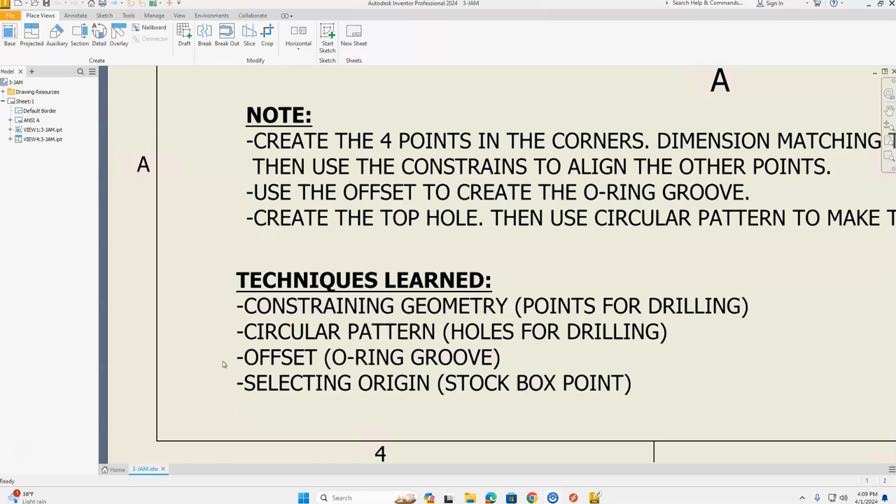Today we're going to take a look at creating the 3-jam part in Inventor. The things that we're going to be focusing on today is constraining geometry for the points for drilling and pocketing. We're going to use circular pattern, we're going to offset, and we're going to select the origin from our stock box point. A little different than we're used to.

We're going to come back and take a look at this note that's up here once we get to those sections on the part itself. Taking a look at this, we can see that we're going to be using our rectangle tool for this first geometry we're going to be creating, and it is going to be a rectangle that is 3 inches horizontal by 3 inches vertical. Okay, come along.

This is the 3-jam. Let's go up to the orange file in the top left hand corner of the screen and select New. We're going to choose standard.ipt and click Create. And then we're going to take a 2D sketch, place it on our XY plane, and click Front in our World View Cube. And let's start with that rectangle tool. Lock onto our origin, get our green dot, click, stretch it out to the upper right hand quadrant.

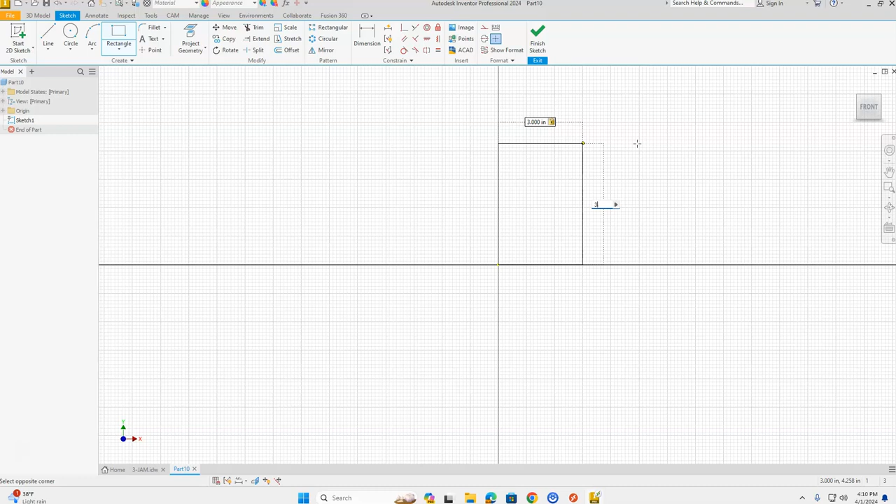Our horizontal dimension was 3. Press the Tab key on the keyboard. Our vertical dimension was 3 also, and press Enter on the keyboard. Green check mark, Finish Sketch. Let's click Home in our World View Cube to zoom all, and let's go back and reference our part. So we have 3 inches by 3 inches.

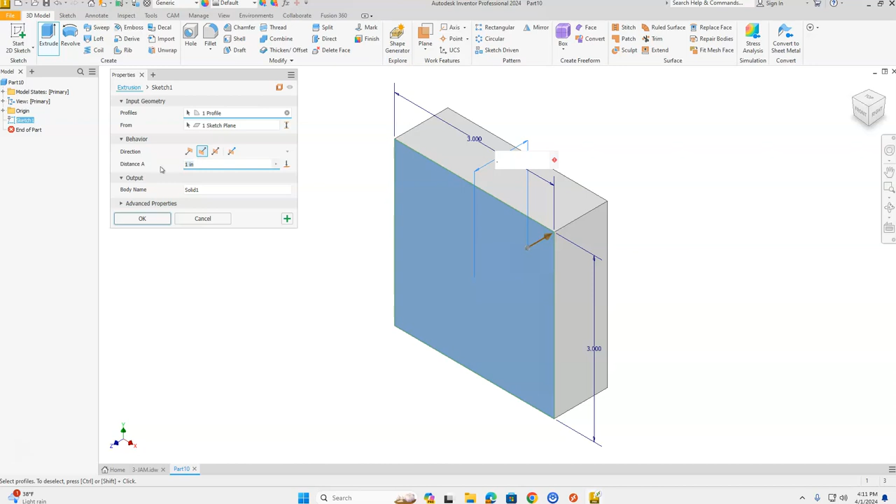Now we need that extrusion depth. We're going to find that on the right side view here. 0.375 is that extrusion distance. So let's take an extrude. We want that orange arrow going away from us. So we're going to click our flip direction, and we're going to change that to 0.375, and then click OK.

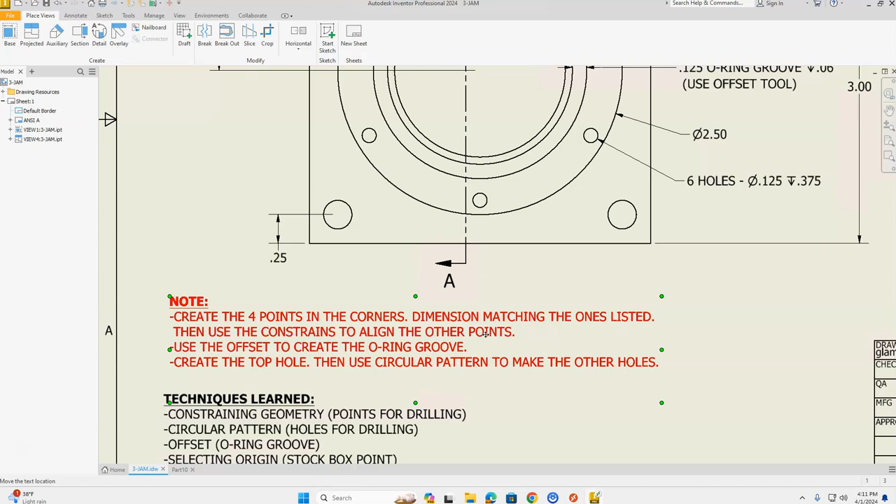Next, let's take a look at our part. We have these 4 holes that are in the corner of our rectangle, and on our note that's down here, you can see that to create the 4 points in the corner, we're going to dimension matching the ones that are listed, and then we're going to use the constraints to align the other points. So that's with our horizontal and vertical constraint. Okay? So let's do that.

Let's take a 2D sketch, place it on our front view, click Front in our World View Cube, and we're going to use our point tool to place those points, 1 in each of the corners. Okay? Now, next we need to dimension those. So let's press Escape to let go of the point tool and reference our drawing again.

This top point in the top left corner is 0.25 down from the top and in from the side. Let's start with those dimensions first. 0.25. So dimension from the top to the point. Bring that out to the side. 0.25 is the dimension. Press Enter on the keyboard or a green check mark in that window. And once again, dimension tool, left hand side to our point. Bring this up. 0.25 is this dimension as well.

For our next dimension for this point over here, let's take a look at that. 2.75 from the left hand side to the center of that point. So let's dimension left hand side to the center of that point, and this dimension is 2.75, green check mark. And let's see what other dimensions we have for these holes. We have 0.25 from the bottom up for this hole here, so let's place that dimension from the bottom to our point. 0.25, and green check mark or Enter on the keyboard.

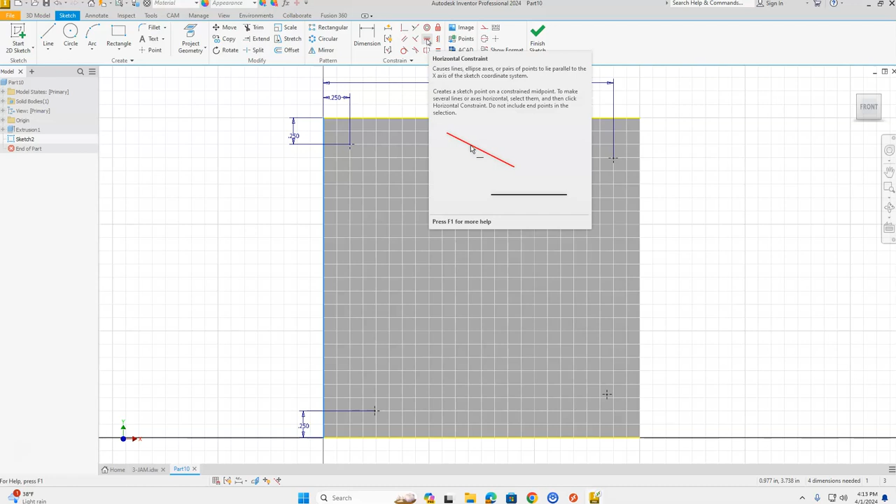Alright, next, press Escape to let go of the tool, and now from our note that's here, we're going to use constraints to align the other points. So in our constraint area, we're going to find our horizontal constraint. That looks kind of like a feather laying horizontally. So we want to click our top left hand point, top right hand point, and that's going to bring that point up. We're going to click our bottom left hand point, bottom right hand point, and that's going to bring that other point into alignment.

Next, we need to press Escape on the keyboard to let go of the horizontal constraint, and we're going to choose our vertical constraint next. And we're going to click our top left, bottom left, and that's going to align those two. And then we're going to click our top right and our bottom right to align those as well. Green check mark, Finish Sketch.

Now let's take a look at what we're going to do for the holes. For the holes, we need to find a note. Here it is. The note says we have 4 holes, 0.25 diameter, and it goes all the way through.

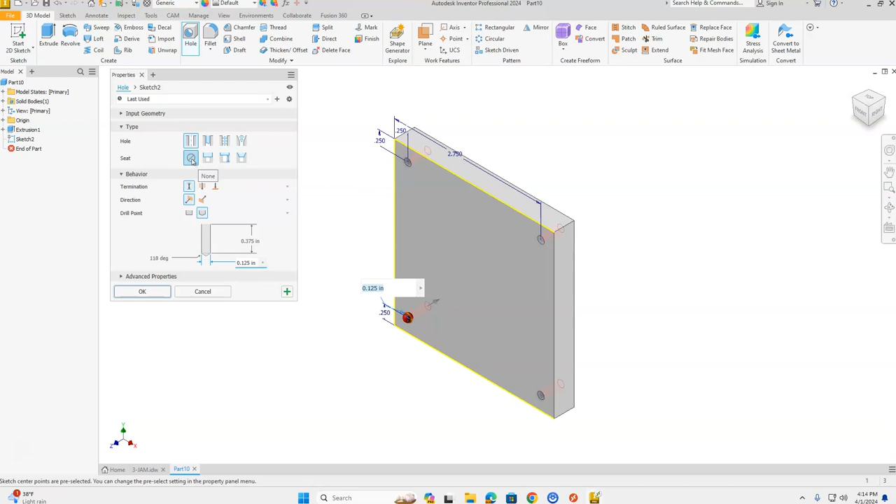So back on our part, let's go use our hole tool. We want to have a simple hole with no seat. We want to change the termination distance from distance to through all. It looks like a stack of pancakes with a fork stabbed in the middle of it. And we want to change our diameter here to 0.25 and click OK.

Excellent. Next, you can take a look at our part here. We have this square in the background done. We're going to take this circle and extrude it out. There's an inside and an outside to the circle. The inside diameter is right here at 1.5 and the outside diameter is right here at 2.5. So that's next for us.

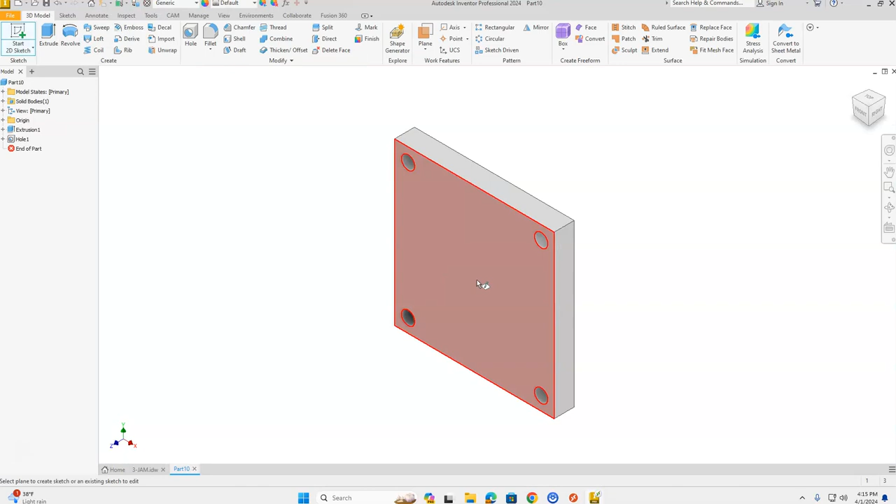So let's take a 2D sketch, place it on our front view. Click front in our world view cube to zoom all and center it on our screen, and we're going to use our circle tool next. We're going to place a circle and we're going to stretch this out for the inside diameter of 1.5. Press enter on the keyboard. Press the escape key.

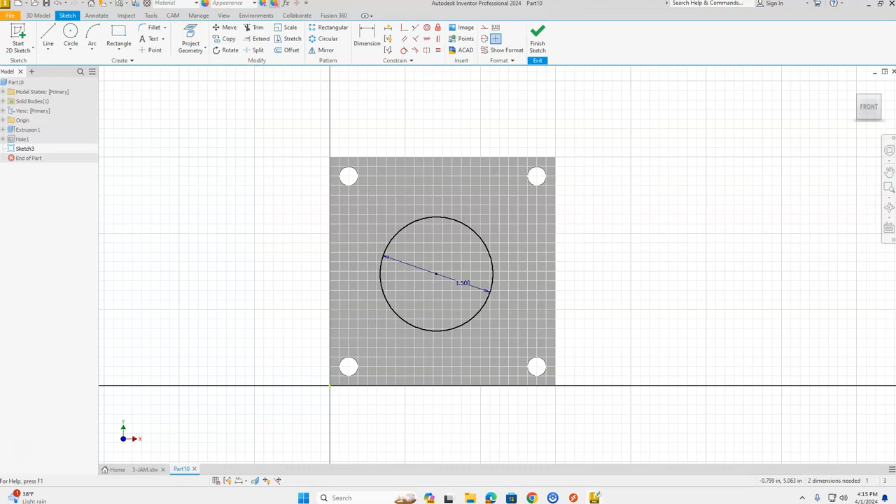Now we have to take a look at positioning this on our part. The center of this circle, the center of this part, is 1.5 in from the side and 1.5 down from the top. So let's get our dimension tool. Let's click the top of our part. When it turns red, click to select it, and we want the center point turned red on our circle. Bring this dimension out to the side. This is 1.5 for that dimension. Enter on the keyboard or a green check mark.

Then we're going to choose the left-hand side of our part and the center point of that circle again. Bring this dimension up. This dimension is also 1.5. Enter on the keyboard or a green check mark. Okay. Next, the outside circle. Our outside circle out here is 2.5 inches, 2.5 for the diameter. So let's go create that one as well.

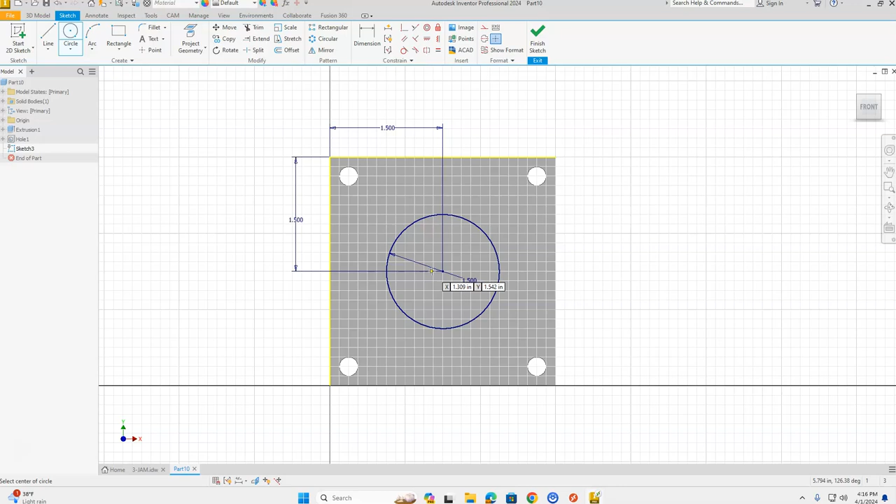We're going to use our circle tool, lock onto the center point, that's the center of that circle, bring this out, and this circle was 2.5 in diameter. Press enter on the keyboard. Green check mark, finish sketch, and now we're going to extrude that. Taking a look at our drawing for this extrusion, we find that on the side view. We can see that this from our square out for our circle is 0.375 for our extrusion distance.

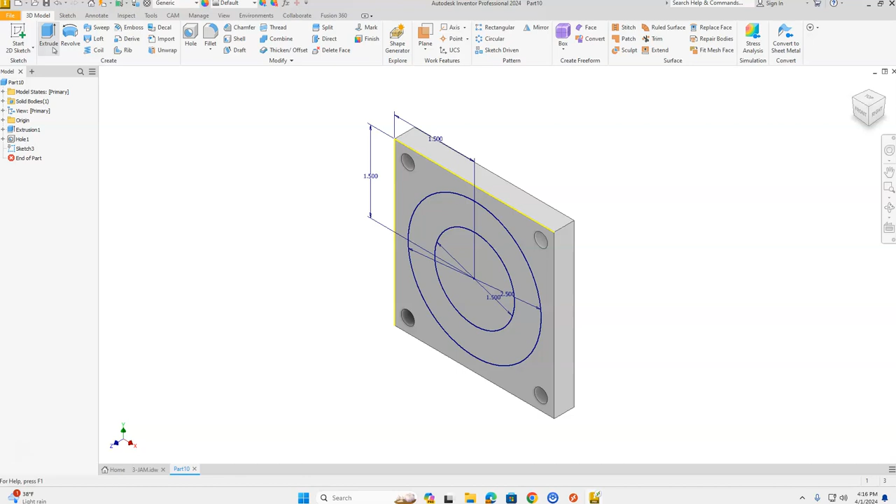So we're going to get our extrude tool from the ribbon bar at the top. We want to click our shape, our geometry in here that makes it look like a donut, not the inside. We want the outside. Looks like a donut. And we're going to change our extrusion distance to 0.375. And then click OK. Hey, we've got a great start on it so far.

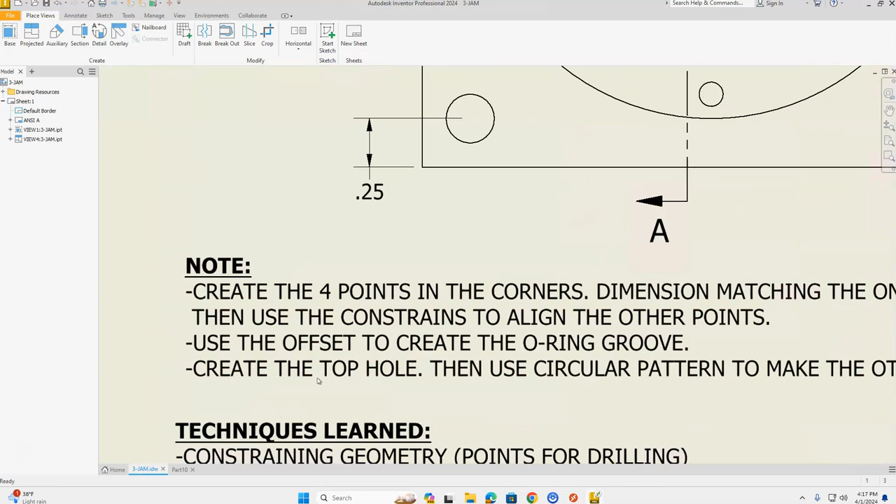Let's see what's next. Next, we're going to create these holes that are in here. So in order to do that, if you take a look at our note that's down here, it says create the top hole and then use circular pattern to make the other holes. Okay, we can do that next. So we're going to create this first hole up here. We're going to place a point, and that point is going to be 1.5 in from the side and 0.375 down from the top.

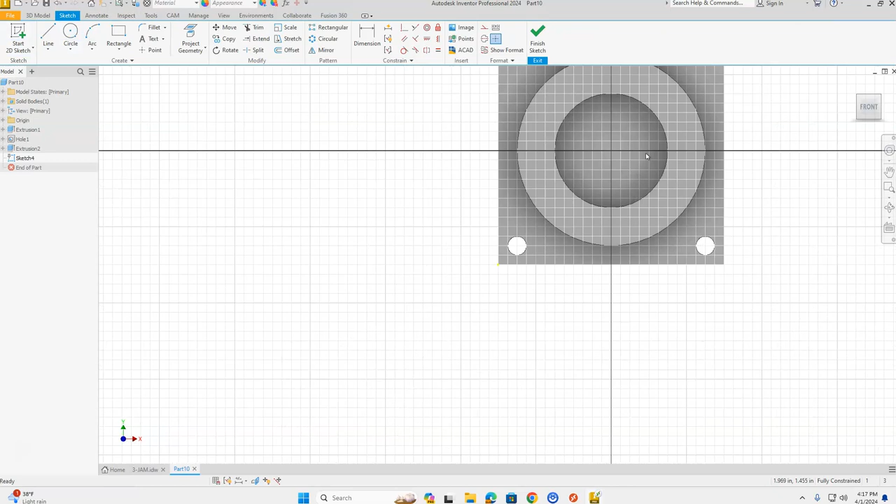So we're going to take a 2D sketch, place it on our front view, and click front in our world view cube to zoom all and center that on our screen. We're going to use our point tool from the create section in our ribbon bar.

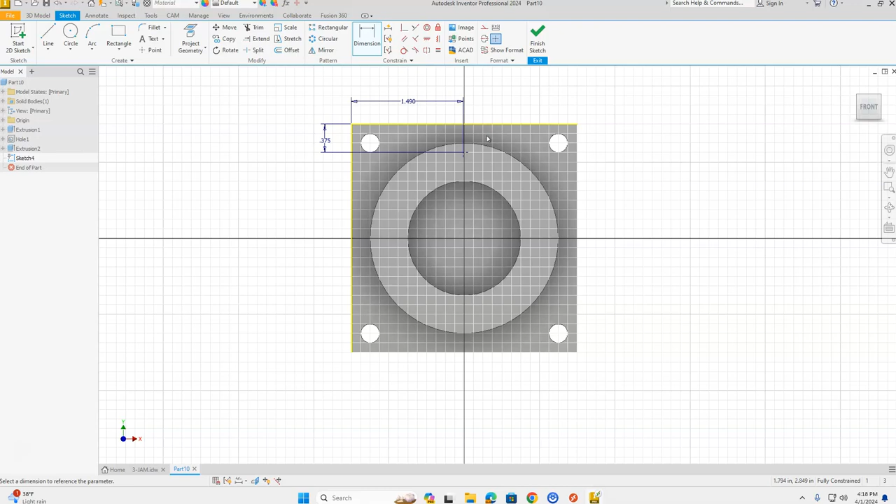Click a point up here towards the top at the 12 o'clock position as it would be on a clock, and we're going to dimension from the top of our part to the point. Bring that dimension out to the side, and this dimension is 0.375. Green check mark. We also are going to dimension from the left-hand side of our part to that point we created, and this dimension is 1.5. Green check mark. And now we're going to finish sketch.

Going back to our drawing, we're going to use our hole tool. So now we need a specification for the holes that are here. Right here it is. We have 6 holes that are 0.125 in diameter and 0.375 deep. 0.125 diameter, 0.375 deep. So back on our part, we're going to take our hole tool. It should automatically choose that point that's there.

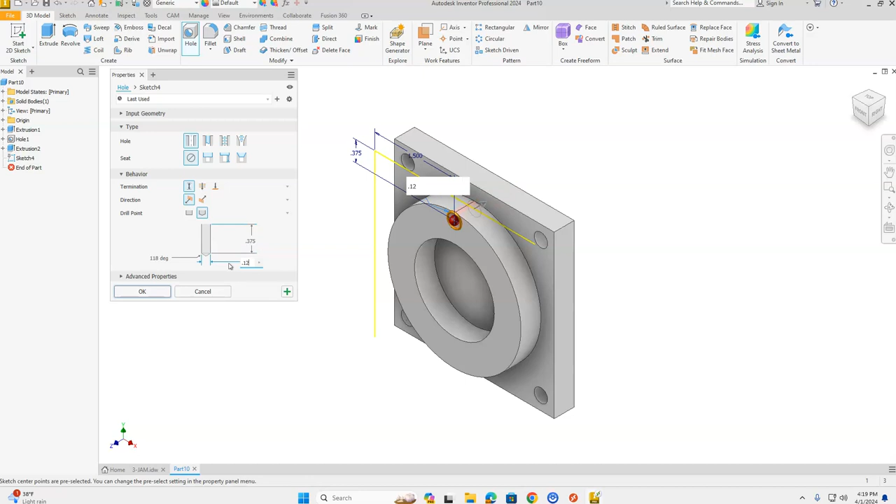We want to have a simple hole with no seat. We want to change it to a distance icon right here for the termination behavior. And we want to change our depth to 0.375. And we want to change our diameter to 0.125 and then click OK.

When we were on Jam 2, we used circular pattern in order to circular pattern the sketch geometry going around. Now we're going to use circular pattern to circular pattern a feature going around. So let's take a look at our note here. It says 6 holes, 0.125 and 0.375 deep. Create the top hole, then use circular pattern to make the other holes.

Back on our part, going up to our pattern section in our ribbon bar, we're going to choose circular pattern. First it wants us to choose the feature. That's the hole that's here. If you have to, you can zoom in to select that. Then we're going to go to our second pick tool that's down here. That's our rotation axis. And we're going to choose the outside of the largest circle on our part for the geometry.

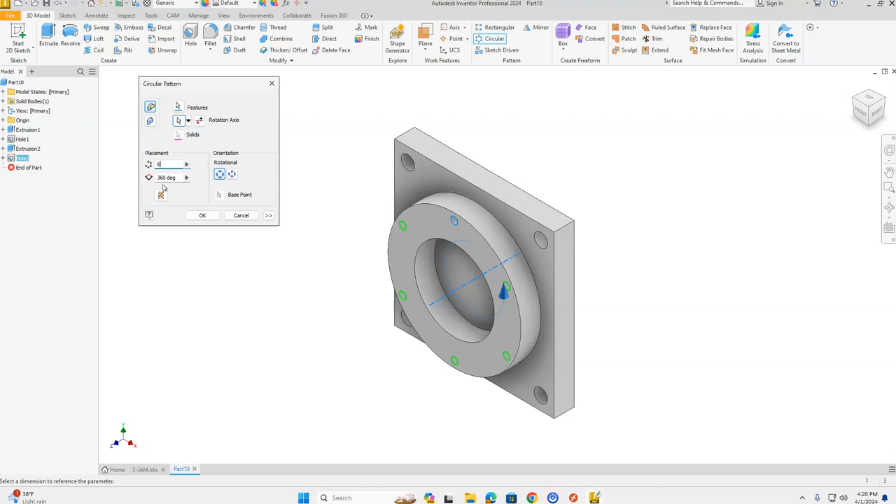We want to have a total of 6 holes, so change our count to 6. We want our rotation degrees to be 360 degrees, and then click OK. And there's our 6 holes going around there. That looks awesome. Let's go back to our geometry, our sketch, and we can see that we have this O-ring going around here as well.

And here we're going to create the inside of the O-ring, which is 1.63. And then we're going to choose the offset tool and offset it 0.125. So let's go back to our sketch and do that. Take a 2D sketch, place it on the front view of our part. Click front in our world view cube to zoom all. That centers it on our sheet.

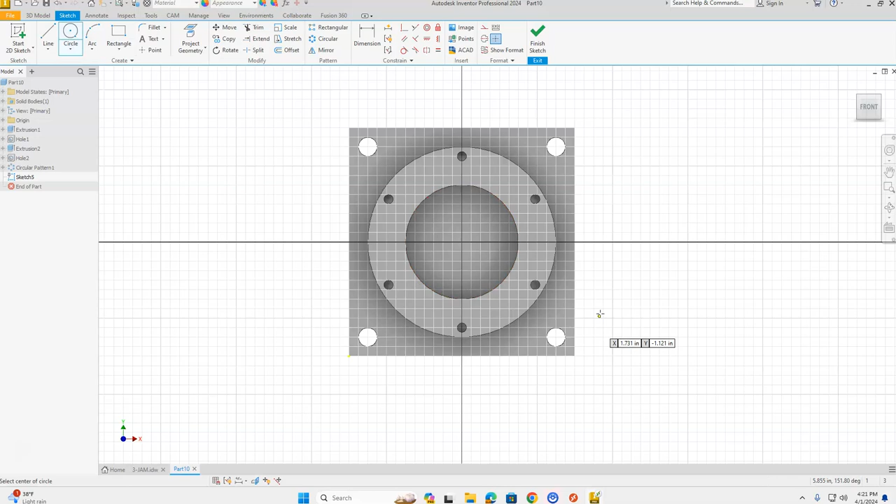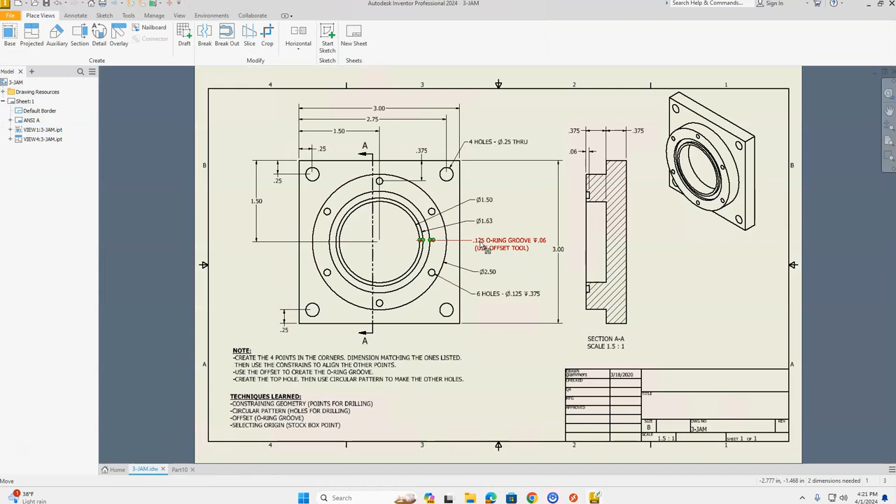And we're going to use our circle tool and we're going to snap onto the center point of our sketch. Stretch this out. This diameter was 1.63. Press enter on the keyboard. And now we're going to choose our offset tool. And our offset tool we are going to use to offset 0.125. Okay?

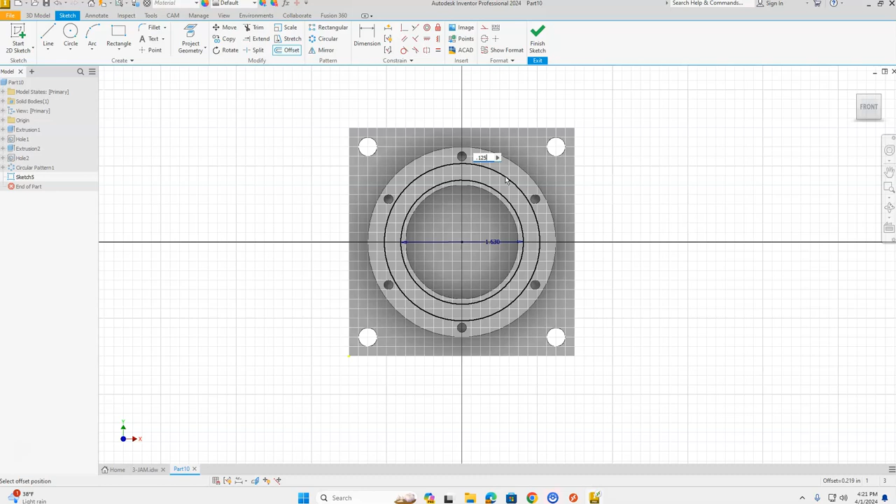So we're going to use our offset tool right here from the modify section. We're going to choose that circle we created. Go to the outside of the circle, not to the inside. And we're going to make that a distance of 0.125 and then press enter on the keyboard. Green check mark, finish sketch.

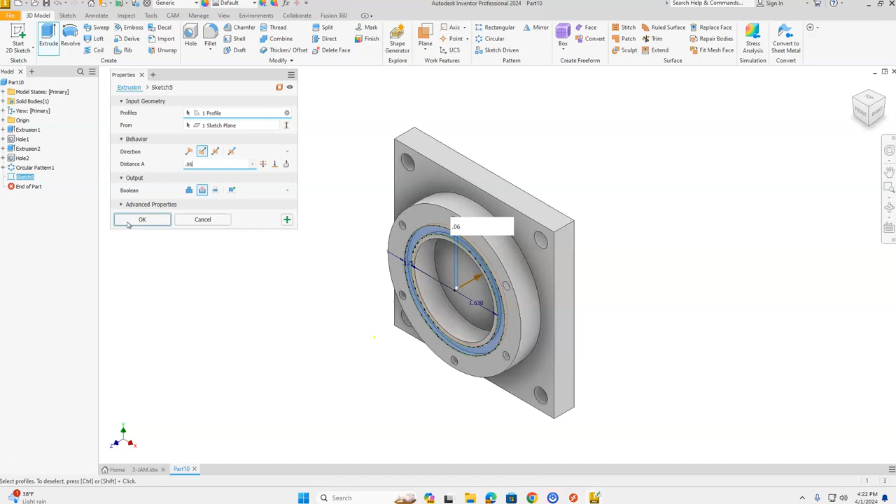And we're going to extrude. Referencing our drawing, we can see here that we want it to go 0.06, and also it's listed here 0.06 for that depth. So we're going to extrude, select that area in there, that O-ring groove, and we're going to change the flip direction so it cuts, and we're going to change our distance to 0.06 and then click OK. So now we have our O-ring groove in there.

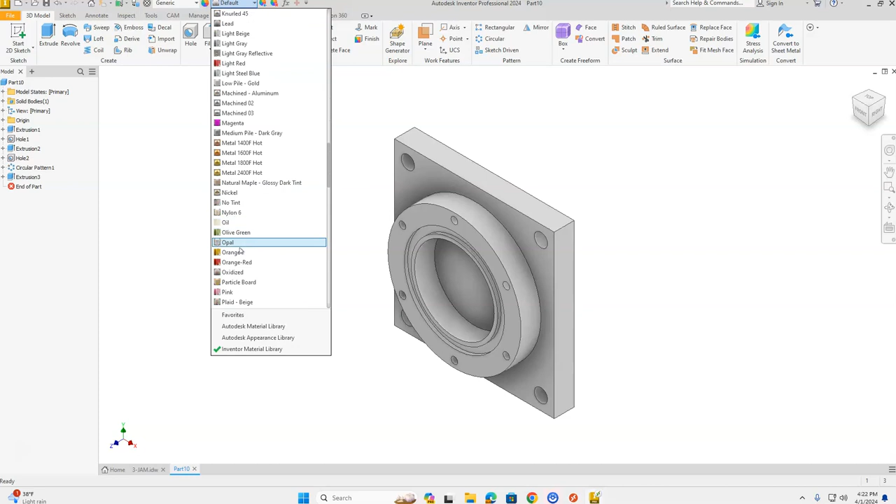Let's see if we're missing anything else. Looks like we have all the different geometry drawn for our parts. Let's change our material by going up to above our ribbon bar and clicking the default section, and we're going to scroll down until we find the O's, and we're going to choose orange. That looks great. Let's go up to the orange file in the top left hand corner of our screen, and we're going to click on Save As.

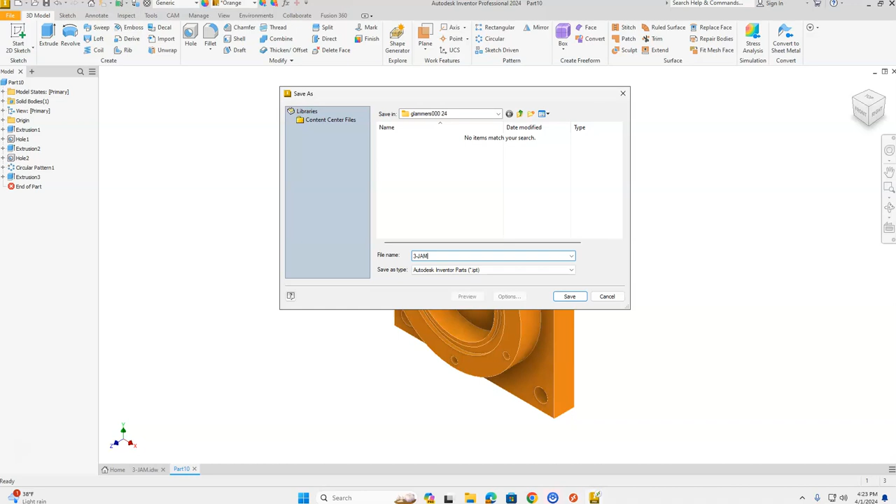We're going to put this into our H drive, first initial last name 000, and we're going to change the file name to 3 Jam, and click Save. Awesome on creating the 3 Jam part. We'll see you in the next video where we create the tool path to cut this on the CNC mill.